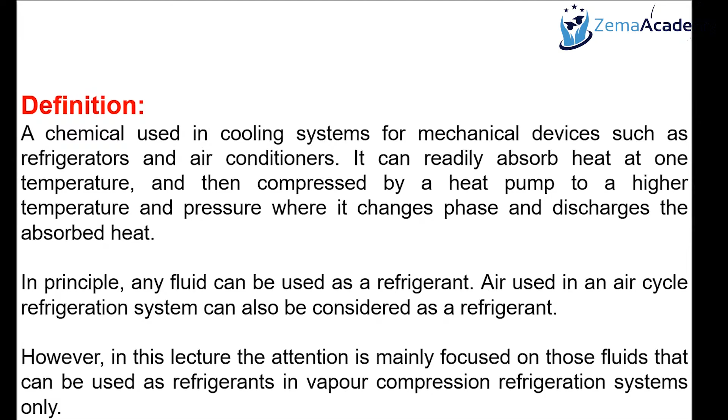How do you classify refrigerants? What's the classification method? Primary and secondary? Yes. So ultimately, we can classify them as primary and secondary refrigerants. Okay? And we'll look at in a minute the definitions of what a primary refrigerant is, what a secondary refrigerant is.

So the primary refrigerant is the refrigerant that we have inside here, which is constantly and continuously changing its phase from gas to liquid, constantly changing its phase. So the primary refrigerant is always changing its phase from gas to liquid, back liquid to gas, and then gas to liquid. Okay, so those are the primary refrigerants that we are referring by primary refrigerants.

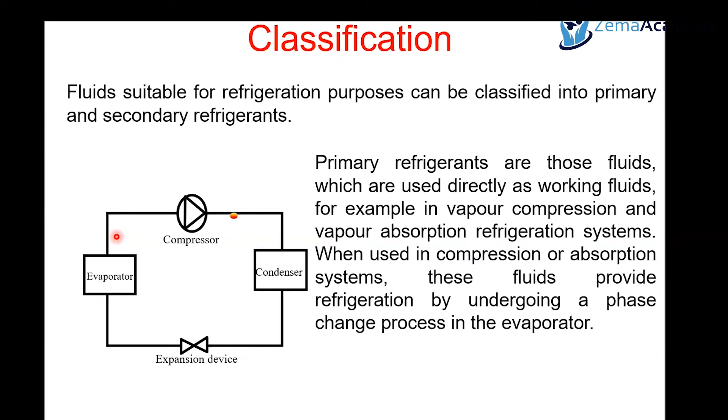And the secondary refrigerant, I'm sure by now you've guessed what they are, the medium that we use to reject the heat into the atmosphere. Secondary refrigerants, so here, for instance, when we look at the condenser, we've looked at how to classify condensers, and we say we can classify condensers based on either water-cooled or air-cooled condensers on the secondary circuit. So for instance, here we can see two ways, so the yellow animation is assuming it's water that we're using. And then of course we've also got fan here, which is blowing air to there. So the secondary refrigerants, we are referring to the secondary medium that we're using to extract the heat from.

Okay, so we can use water as a secondary refrigerant if, of course, the operating temperature is above 0 degrees C. Okay, so provided that the environment that you're in is above 0 degrees C on the secondary circuit, we can use pure water as a refrigerant. But the only time that we may have difficulty is in areas where it's colder. Okay, so therefore, of course, water will start to freeze, and the solution to that, of course, we use antifreeze solutions, so the brine solutions here. Okay, so the question, can we use water as a refrigerant? Of course, we're using water as a refrigerant on the secondary circuit, but we can also use antifreeze brine solutions to minimize the freezing aspect.

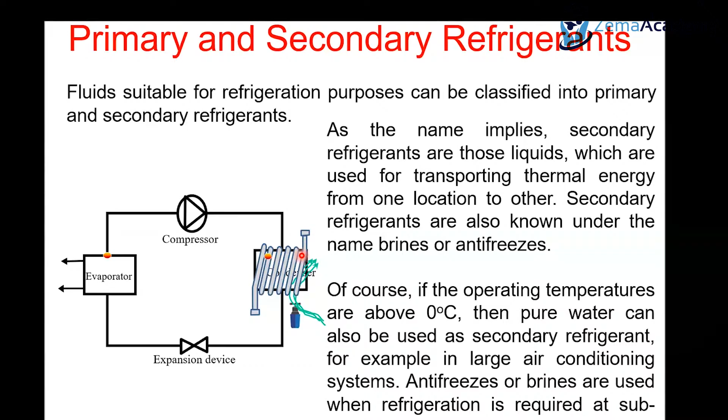So now we know the refrigerants can broadly be classified as primary refrigerants. The primary refrigerants are constantly changing its phase, and then also the secondary refrigerants on secondary circuit are the medium that we're using to extract the heat. It could be water, or it could be air. So those are the secondary refrigerants. Okay, so if one was to ask you what's the difference between primary and secondary refrigerants,

the primary refrigerants are constantly changing their phase. They're constantly boiling and condensing. Okay, so inside the circuit, so we've looked at here, the primary refrigerants are constantly changing its phase from liquid to gas, and gas to liquid, liquid to gas. Okay. Whereas the secondary refrigerants, they do not change their phase. They are constantly or always liquid. They don't necessarily have to change their phase. So that's primarily the difference between primary refrigerants and secondary refrigerants. Primary refrigerants are always changing their phase, but the secondary refrigerants don't change their phase or state.

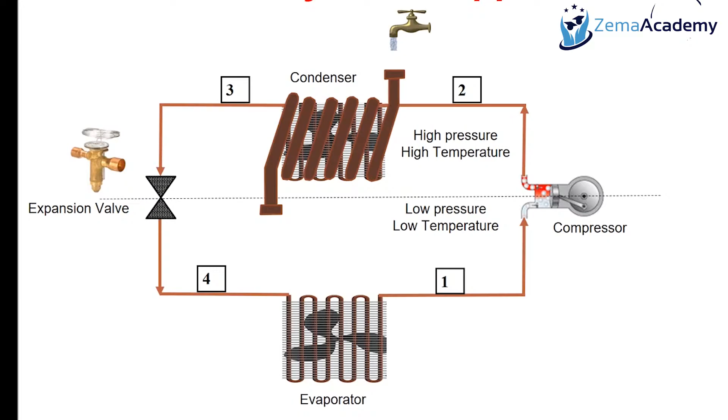Okay, so now that we know the definition of a refrigerant, and we also know how to classify a refrigerant, what are the selection criteria for selecting the best refrigerant? Primarily, 4 selection criteria that you need to consider in order to select the best refrigerant. The thermodynamic and thermophysical property. We will look at one by one what we are actually referring by thermodynamic and thermophysical property. That is an important aspect for you to decide what kind of refrigerant that you may want to use in a system.

Environmentally friendly, again, one of the primary and dominant discussion that we are having everywhere is how we can have an alternative low GWP refrigerant, how it needs to be non chlorine and fluorine and bromine containing chemicals or substances. Safety consideration. Again, we'll look at what we are referring by safety consideration. You don't want to specify a chemically hazard refrigerant.

Again, we'll look at one by one what we're actually referring to by safety considerations. And economics, of course, the cost is the first aspect that you guys have talked about. Is it well proven? Has it been used before? Is it low cost? And availability, again, BJ, you've talked about. Would it be available for the medium to long term? Okay, so those are the 4 primary selection criteria that you can consider in order to

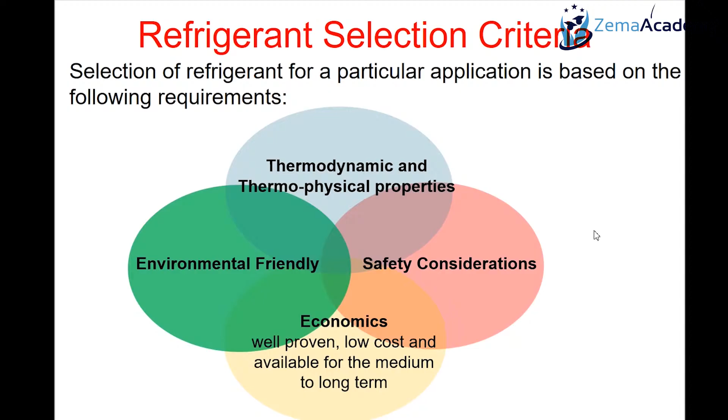reach in selecting the best environmentally friendly refrigerant. Okay. So we've talked about the thermodynamic and thermophysical properties, and let's look at what we meant by thermodynamic and thermophysical properties and how we should consider them. So far, when we've looked at the vapor compression system, we've looked at the importance of the relationship between pressure and temperature. If you increase pressure, you also increase the temperature. If you reduce the pressure, you also reduce the temperature. So the boiling point and the freezing point of a refrigerant in terms of the temperature and in terms of the pressure is one of the criteria that we need to consider.

The discharge pressure and the pressure ratios. So again, we've looked at how a system, depending on the pressure ratio, depending on the condensing and evaporating pressures that you operate, could perform well in terms of the COP of the system, or it can struggle to perform, therefore very low COP, because the higher the pressure ratio, again, those of you who did the experiment, you may have started to plot this and look at the relationship between the condensing pressure and the COP. The higher the pressure ratio, the lower the COP, the higher the power consumption of the compressor. Okay, so the temperature-pressure relationship of any refrigerant is another important aspect.

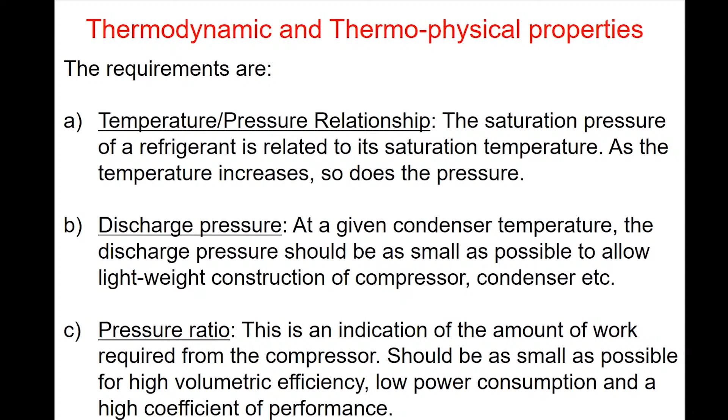The latent heat of vaporization. Again, we've looked at how we can calculate based on the mass flow rate of the refrigerant and the heat of vaporization, the difference between the inlet and outlet of the evaporator, and also if you know the freezing and boiling point of a refrigerant, indirectly it also tells you the amount of heat that you may require to boil and to freeze that refrigerant. And ultimately, of course, it's that energy that we're interested in. If we can get away with a very, very small amount of energy input into the refrigerant, then it's preferable. We've looked at the isentropic index, how it's important. Again, the type of refrigerant that we use, but ultimately the overall losses in the system are also interlinked between the two.

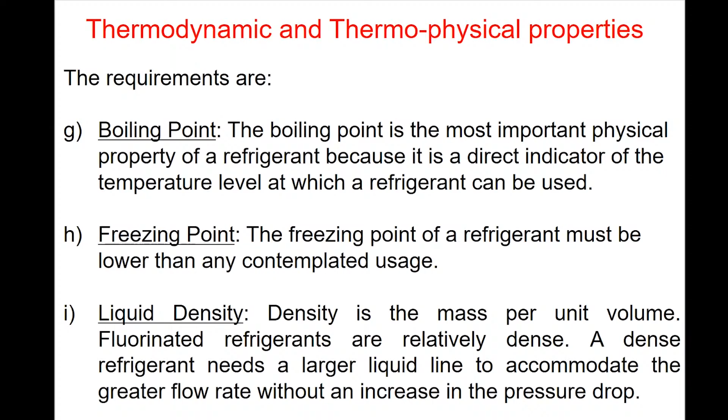Specific heat, again, importance of the properties of the refrigerant in terms of the specific heat of the refrigerant that we're using. We've talked about the boiling point, we've talked about the freezing point, and again, the density would also affect it. So when you have a very, very dense refrigerant as opposed to slightly less dense refrigerants, that would also affect the pressure drop in the circuit. Again, when we looked at the expansion valve, we looked at how the pressure drop and the viscosity are other important parameters that we need to consider, because they also relate to the pressure drop in the system, and therefore, of course, the temperature drop in terms of the refrigerants. So all these parameters are what we call thermodynamic and thermophysical properties of the refrigerant, and we need to consider all these aspects when we select any refrigerant. Okay, so that's what we were referring to by the first selection criteria, looking at the thermodynamic and thermophysical aspect.

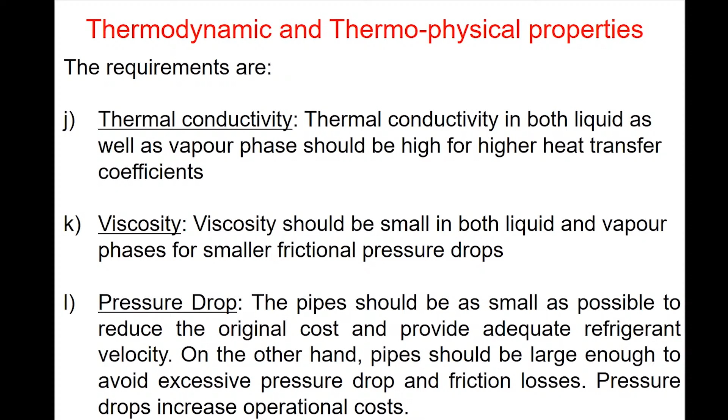The second selection criteria that we looked at is being environmentally friendly, or the impact to the environment. So the environmental impact of the refrigerants, but of course the refrigeration in total, or the systems that we use in total. Now, it wasn't until around the 1980s, or 1987 to be specific, that researchers found out that CFC is becoming a major disruption to our lower atmosphere, or our ozone.

The fact that when we release, or if there's a leakage from the refrigerants that we use, which contain the CFC type of refrigerants, and if they react with the sun's UV or the ultraviolet rays, they easily break down the compound. So they release, as a byproduct, chlorine, which is responsible for facilitating the depletion of the ozone, or the thinning of the ozone. So it was around 1987 that they started to talk about the CFCs and the impact of the CFCs, and how the byproduct of the CFCs, which the chlorine molecules react, and the impact of that is the depletion of the ozone layer. So we're talking about some of the chemicals thinning or depleting that layer, which is the ozone layer, or the lower part of the stratosphere level of our atmosphere.

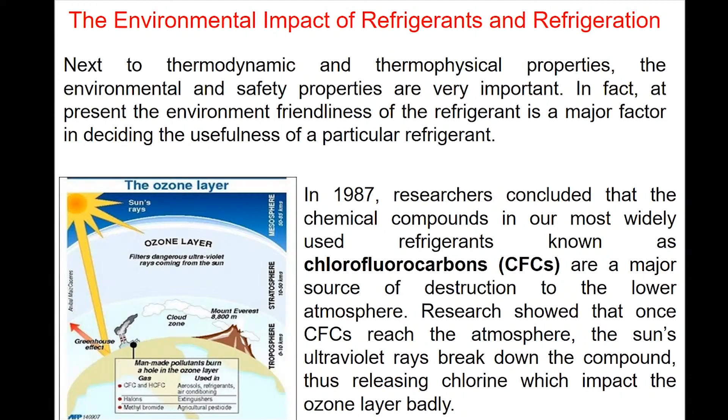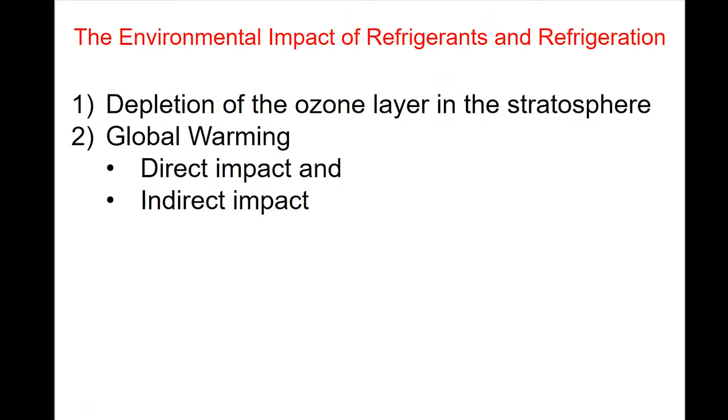And we're also saying they're responsible for global warming through the direct impact, which is the leakage, and the indirect impact, which is the fact that we need electricity to operate the systems. That's what we're basically saying. The benefit of our ozone layer is that it filters dangerous ultraviolet rays coming from the sun. So it's important that we deal with or minimize the depletion of the ozone layer. Otherwise, we will cease to exist.

And ultimately, we're talking about CFCs and HCFCs, which are ozone depleting substances. We will look in a minute at what we are referring to by ozone depleting potential or ozone depleting substances. Ozone depleting substances primarily refer to refrigerants which contain chlorine, fluorine, and bromine. Those chemicals tend to easily react with ozone and facilitate the thinning or depletion of the layer.

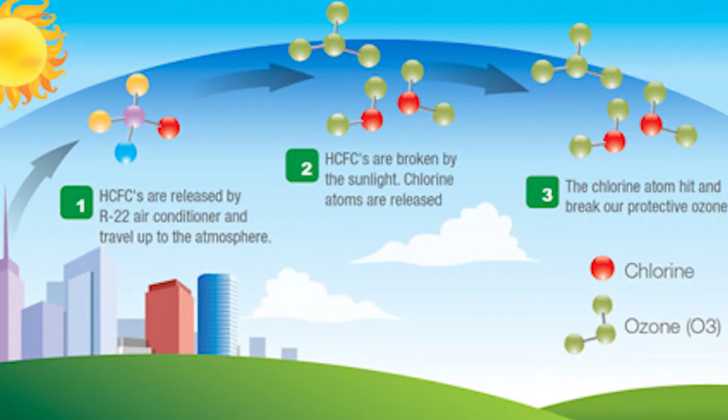So we talked about what happens if you thin it. Ultimately, there are huge implications. Let's look at just two implications. High exposure to UV rays from ozone depletion can easily cause skin cancer. Then, the impact of refrigeration generally, and the implication of that for global warming and how we contribute to global warming.

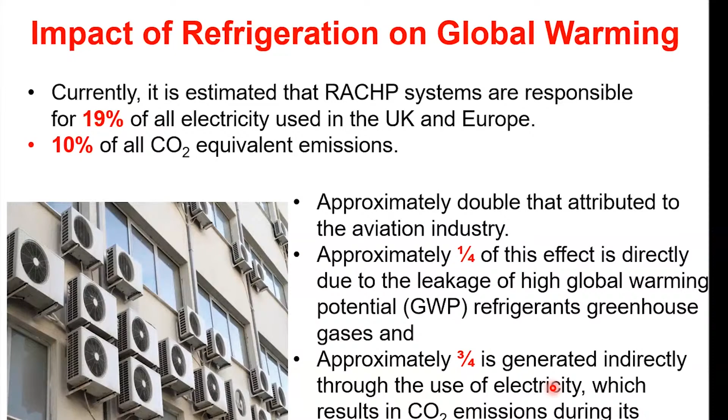Primarily, approximately a quarter of the effect is through direct impact, directly due to the leakage of refrigerants, and three quarters is generated through the use of electricity. So the indirect impact is larger than the direct impact. Of course, the direct impact is the leakage of refrigerants, and we've seen in the previous slide how they react with the sun's UV and how they can easily break down or facilitate the depletion of the ozone. So that's the direct impact through the leakage of refrigerants. The indirect is the fact that we need to supply electricity to the systems to operate.

And in order to generate this electricity, unless we're using renewable energy, the chances are we will be using fossil fuels. So we are also emitting carbon into the atmosphere in order to generate the electricity for the system's electricity requirement. Okay, so that's what we're referring to by the direct and indirect impact of refrigerants and also refrigeration systems.

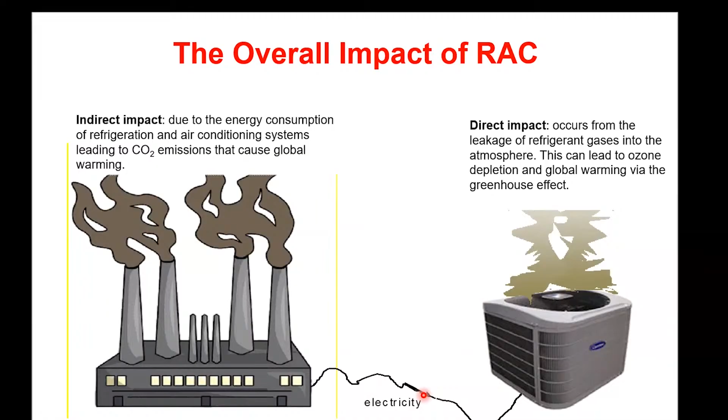Okay, so I think in the past few slides I've used the words ODP or ODS, ozone depletion potential, or ozone depleting substances. I've also used words like GWP, global warming potential. So let's look at some of the definitions, so that when anyone is using them, you have a better understanding. By ozone depletion potential, or ODP, we are actually referring to the ability of a chemical or a substance to destroy the stratospheric ozone.

And we looked earlier at how in 1987 researchers started to discover that CFCs were having an impact on the stratospheric ozone. So our benchmark is the CFCs. We compare all refrigerants to the CFCs, which have an ODP of 1. So when we talk about ODP, we are comparing them to CFCs. We look at GWP, and again, our benchmark, our index, is carbon dioxide.

So when we talk about ODP, primarily we are talking about whether the substance or the chemical that we're using contains chlorine, fluorine or bromine molecules. That's what it means. And we're comparing it to the CFC being the benchmark. So if someone is saying a refrigerant is 0 ODP, they're purely saying that the refrigerant does not contain chlorine, fluorine, or bromine, or any halogenated compounds.

ODP or ODS is the ability of any chemical or any refrigerant or any substance to destroy the stratospheric ozone. The ODP depends mainly on the presence of chlorine, fluorine, or bromine, as I said earlier. So that's one index that we use to categorize refrigerants, and how the substance may contain some harmful chemicals that can easily destroy our stratospheric ozone. So this is for destroying our ozone layer primarily.

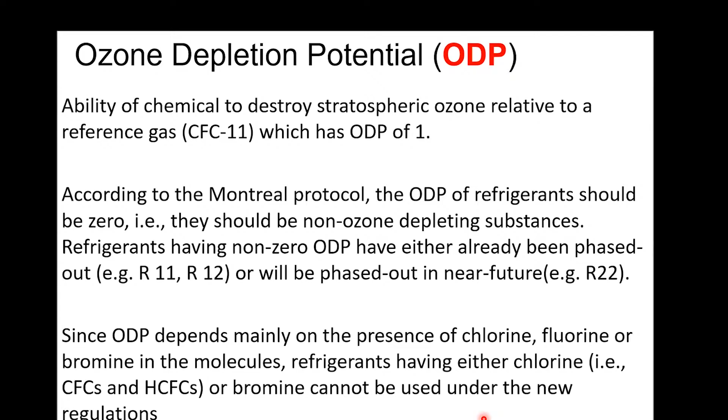And there is another index that we use, which is called the global warming potential. So we've looked at ODP and how it refers to the presence of chlorine, fluorine, and bromine, and we compare ODP to our benchmark, the CFCs. And for the GWP, similarly, we use CO2 as an index. The definition of a GWP is the ability of a greenhouse gas or a substance to trap heat. I briefly talked about this earlier. When we compare the different types of refrigerants, some of them are very highly effective in trapping heat. So ultimately the GWP deals with the ability of the substance to trap heat in the atmosphere, and everything is compared relative to carbon dioxide.

Because when we talk about global warming, we talk in terms of carbon emissions, the carbon dioxide emissions. So our benchmark or our index is the CO2. On the ODP, our benchmark is the CFCs, with the value of CFCs being 1. And in the GWP, it's compared to CO2, with CO2 having the index value of 1. Again, we'll look at some examples. If we say a GWP of 10, that means the substance or the chemical will trap 10 times as much heat as the same mass of CO2 over 100 years.

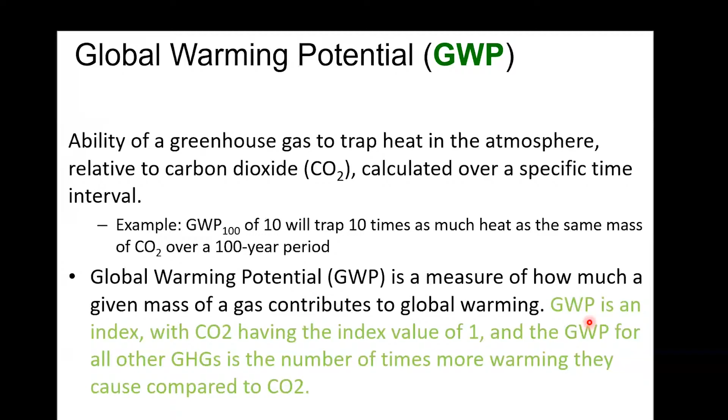And we'll look at some of the examples. For instance, let's take methane. 1 kilogram of methane causes 25 times more warming over a 100-year period compared to 1 kilogram of CO2. So as I said, everything is compared to CO2. Your CO2 is a value of 1. So in general, we can say methane has a GWP of 25. So preferably, coming back to the question that we introduced at the beginning, you would want a refrigerant which has as low a GWP value as possible, of course, to minimize and reduce global warming.

You may have refrigerants with 0 ODP, meaning the refrigerant you're using does not have chlorine, fluorine, or bromine, but they may have a very high value of GWP. A good example that we've been using for the labs is the refrigerant R134A. There's also a dilemma between the two indexes that we're using. The refrigerant might be 0 ODP, but on the other hand, it might have a very, very high GWP value. So we have to be able to balance. There may be an ODP aspect, but the GWP is very low.

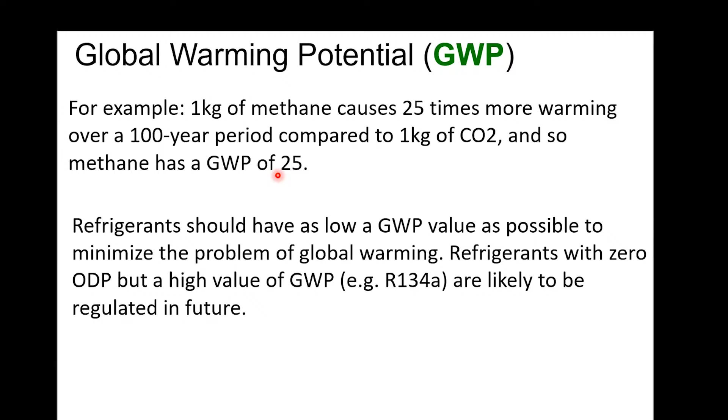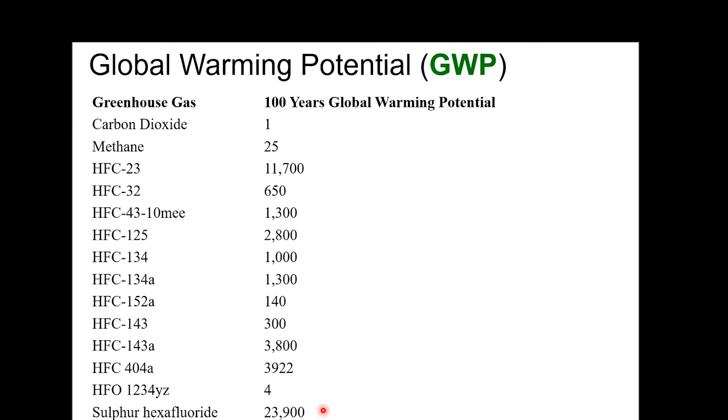So these are some of the GWP values for the different refrigerants that we use. Carbon dioxide being our benchmark, 1. We said methane's ability to trap heat is 25 times that of carbon dioxide. If you use HFC-23 refrigerant, its ability to trap heat is 11,700 times that of carbon dioxide. So as you can see, compared to carbon dioxide, HFCs have an extremely high capability of trapping heat in the atmosphere. I'm just giving you a few examples to understand what we meant by the value of GWP. Everything is compared to carbon dioxide.